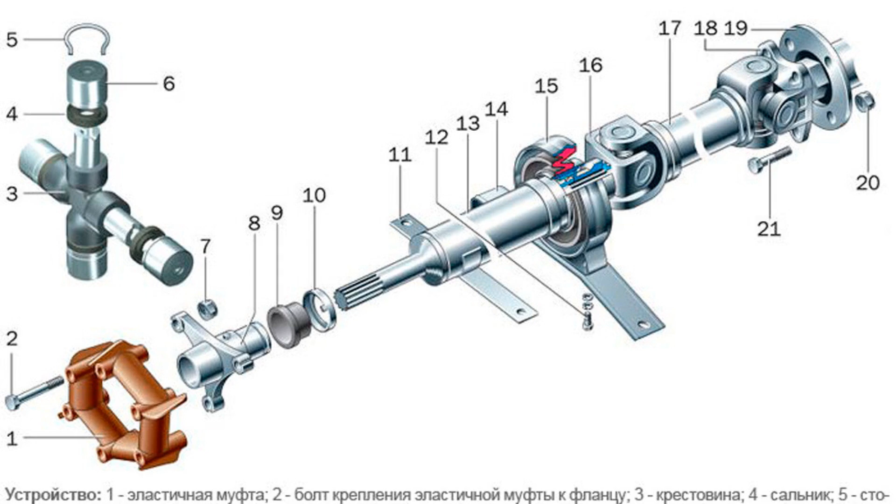This mechanism allows you to provide movement for the wheels and suspension independent from the body of the vehicle. Not everyone fully understands why a drive shaft is needed as part of the automobile design. Such a device becomes practically indispensable when the car drives on rough terrain. When the vehicle moves on uneven surfaces, there are quite strong vibrations on the driving axles, frame, and body. And when there are even minor displacements of axles relative to each other, it significantly increases the wear of elements. As a result, the smoothness of the car is disturbed, which directly affects comfort. All these phenomena can be prevented by the presence and operation of the cardan transmission.

Some vehicles are designed in such a way that the gearbox is located higher than the rear axle differential. Because of this, the torque has to be transmitted at a certain angle. It is possible to realize this transmission of rotation by using a cardan gear or cardan shaft in the design.

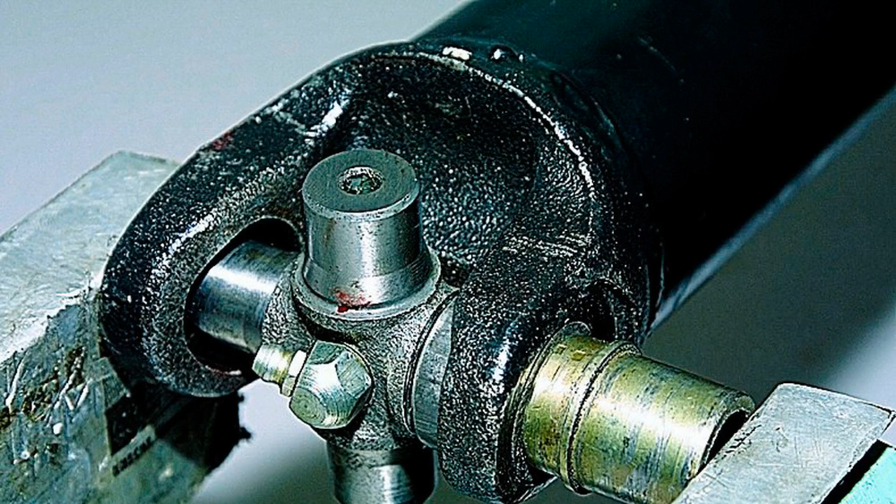Classification. There are several types of cardan gears. Several classification principles are used to determine the specific device. If we consider the types of cardan shafts according to their purpose, then the following are distinguished. Basic. They act as a support for the drive of the leading automobile wheels, meaning they are responsible directly for spinning the wheels in the car. Auxiliary. They are used as an element of the auxiliary mechanism.

They can be found paired with pumps and winches, for example. They can also act as an intermediate structure in various devices. It is also possible to divide the cardan gears into universal ones, which are characterized by the ability to compensate for quite impressive axial displacements. And simple ones, which are devoid of any tricks and features, but they clearly and qualitatively perform the duties assigned to them. But this is not all.

There is another variant of classification, which also divides gimbal gears into two types. Open: this is an independent and separate mechanism in the design of a motor vehicle. Closed: this type of drive shaft is either hidden from view or integrated into another vehicle component.

Based on the design features and purpose, driveshafts can be divided into single-section and multi-section driveshafts. Multi-sectional ones are mainly used in conventional passenger cars and trucks. In the case of single-section driveshafts, we are talking about situations where the need for fast rotation on the drive axle plays a major role. This applies to sports cars that are equipped with rear-wheel or all-wheel drive.

Features of the device. Leaving aside some of the CV components such as seals, mountings, and the elastic coupling, this unit contains several key components.

Although the same coupling plays an equally important role, as it is responsible for absorbing vibrations and sudden jerks.

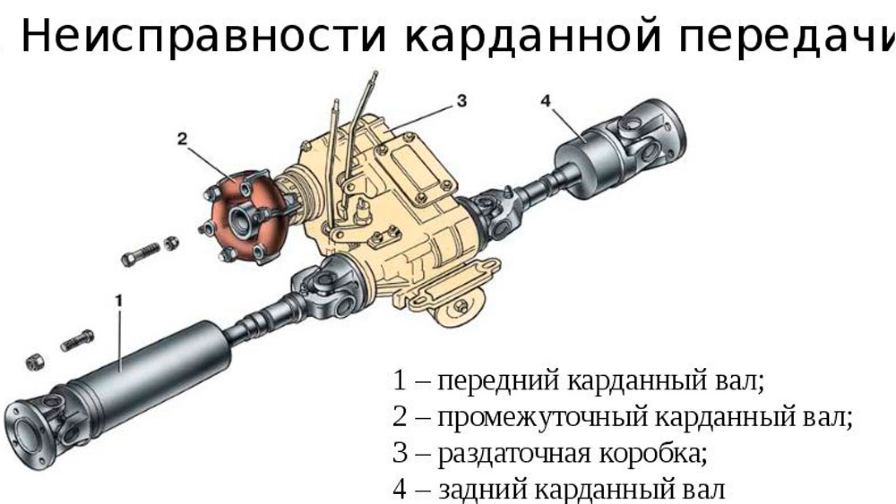As for the device of the cardan transmission, it is necessary to distinguish such components as the central shaft, made of high-strength steel, with the appearance of a hollow tube, and crosses that have swivel mechanisms. A pair of these cross members is used to ensure that all components of the transmission rotate at a certain specified angle.

This is largely responsible for the smooth transmission of torque: spline sliding joints. This element is necessary due to the fact that when driving over bumps or other obstacles, the distance between the axle gearbox itself and the gearbox increases. Therefore, it is necessary to extend the PTO shaft somewhat. This is where spline elements come to the rescue, sliding fork, with its help the ends of the center and intermediate shafts can be coupled or connected to each other.

Suspension bearing, necessary to support the structure, which allows the gimbal to rotate freely along its own axis. Depending on how many sections of the cardan are used in the design, a different number of suspension bearings are used. They are mounted directly on the body of the vehicle.

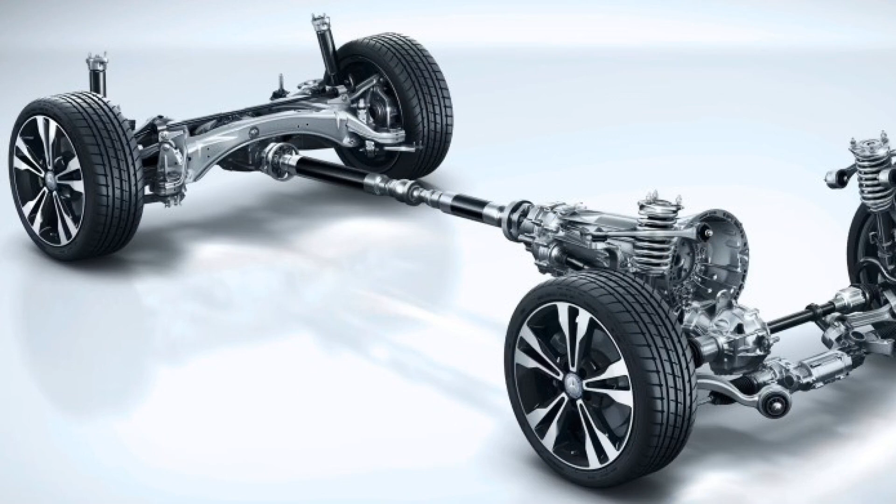But it is not enough just to know what the automobile cardan shaft consists of. It is also necessary to further disassemble the features of all working components. To understand how the cardan shaft works in the car, it is necessary to clarify some nuances about the components of the unit. This way you will better understand the basis of the PTO transmission used in the car.

These units are available as twin-shaft or single-shaft units. In the case of a twin-shaft unit, the mechanism additionally includes an intermediate cardan, to which a shank is welded in the rear section, complete with external splines, and a sliding bushing is mounted to the front section by means of a joint. If the system is single-shaft, then there is no intermediate section on it.

Then the CV outboard bearing is mounted, which with the help of a special bracket is installed and fixed on the body. This acts as an additional mount that prevents excessive shifting during travel. After that comes the fork, which is located between the front and rear of the CV. This is where the cross member with needle bearings is located. These forks and crosses in the design of the PTO shaft allow torque to be transmitted at various angles of possible bending of the PTO shaft.

The CV is fixed at the rear to the rear axle gearbox by means of a flange. At the same time, the shank, which has external splines, is fitted directly into the drive flange of the automotive main transmission. The operation of the PTO transmission is based on the fact that it can transmit torque when the position of the PTO shaft changes in space.

To realize this function, two components play a key role, namely a fork and a cross-type joint. The sliding fork allows for a slight increase in the length of the mechanism when the vehicle is traveling on an uneven stretch of road.

The long spline joint does not allow you to stop transmitting torque, even in situations where the suspension together with the rear automobile axle begins to shift up or down. The task of the joint in this case is to ensure the rotation of the wheels at changes in the angle of bending of the cardan shaft.

It is accepted that the mechanism works productively when the angle does not exceed 20 degrees. If this value is exceeded, the process of active wear of the element begins.

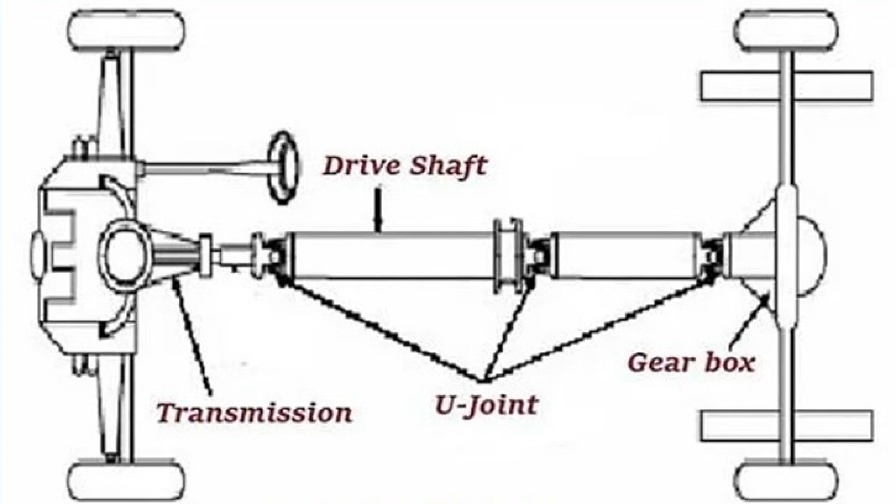Reliability and durability. To a large extent, these qualities are acquired due to the ability of the cardan to withstand serious loads. This advantage is especially relevant for heavy vehicles, as well as cars that often have to drive on uneven roads and rough terrain.

Maintainability. An important advantage of the CV is the fact that individual components can be changed during the repair process. There is no need to replace the entire assembly, which significantly reduces the cost of vehicle repair.

Better steering sensitivity. It is actively manifested on rear-wheel drive cars, where a cardan shaft is used. The drive practically does not depend on the cardan in any way, and therefore the front axle is focused on steering and the rear axle on pushing the car.

Good acceleration. The unit allows the rear wheels to be loaded, but at the same time unloads the front wheels. This helps reduce the likelihood of a phenomenon such as wheel spin on the car.

Rear axle skid control. If a rear axle skid occurs, it can be dealt with much more easily through the use of the PTO. Long service life: the element is really reliable, and its design ensures long service life.

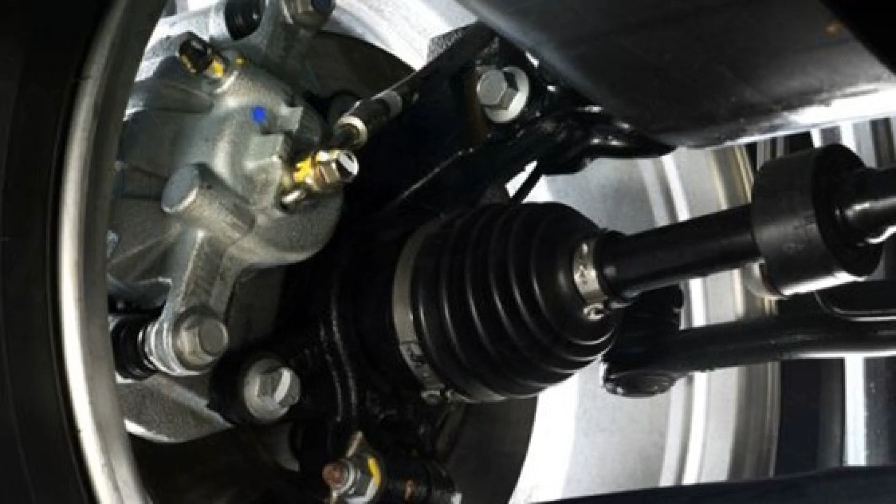Rebuildability. Even when the CV is badly worn or encounters serious breakdowns, it can be restored, although in certain cases this requires special equipment.

But the disadvantages in cardan shafts are also present, and they are sometimes worth paying attention to. If we talk about the weaknesses of the CV, then it is worth highlighting such moments. The main disadvantage is the fact that the shafts do not rotate synchronously when the angle between them increases. But in reality, this disadvantage is not particularly relevant for cars with rear and all-wheel drive. The disadvantage is manifested mainly in relation to front-wheel drive vehicles.

In this regard, the cardan is usually replaced by a more complex device with a similar purpose. This is a design called a ball joint or equal angular velocity joint. Another disadvantage is considered an impressive weight of the structure. Large weight negatively affects the dynamics of the vehicle and contributes to increased fuel consumption.

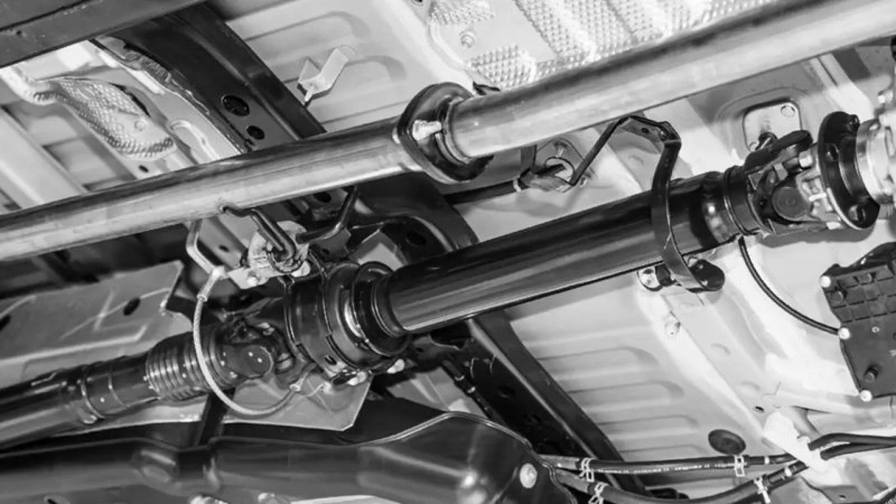In order to install a drive shaft in the car, a special tunnel must be provided. This has a negative effect on the comfort of the vehicle interior, as the middle of the car is sometimes quite a large bump. Cardan shafts can create additional noise and vibration.

Despite the existing disadvantages, some of them are quite conditional and cannot be considered a full-fledged disadvantage of the cardan shaft. Plus, manufacturers are actively working on improving the design, which makes it possible to get rid of some shortcomings as well as to correct the errors of previous versions of cardan gears.

Characteristic faults. The most susceptible to breakdowns in the design of the cardan shaft are such elements as crosses, joints, and bearings. During operation, they are subjected to heavy loads, and the components gradually wear out. Depending on what type of drive is used and what design a particular car has, the service life of these elements usually does not exceed 70,000 kilometers. The speed and intensity of wear are directly affected by operating conditions, driving style, and a number of other provoking factors. Signs of wear are characteristic clicks and knocks that occur when starting the vehicle or shifting gears.

If the front shaft crossmember breaks, there is a scraping and clattering of metal in the area of the front passenger's feet, plus the corresponding lights on the dashboard are turned on, signaling malfunction. Not solving the problem in a timely manner can provoke the breakdown of the front gearbox and automatic transmission, which will cost a very large amount of money. It is important to realize that it is impossible to prevent wear and failure of crosses or joints. It requires timely diagnosis and replacement of these elements in case of signs of malfunction.

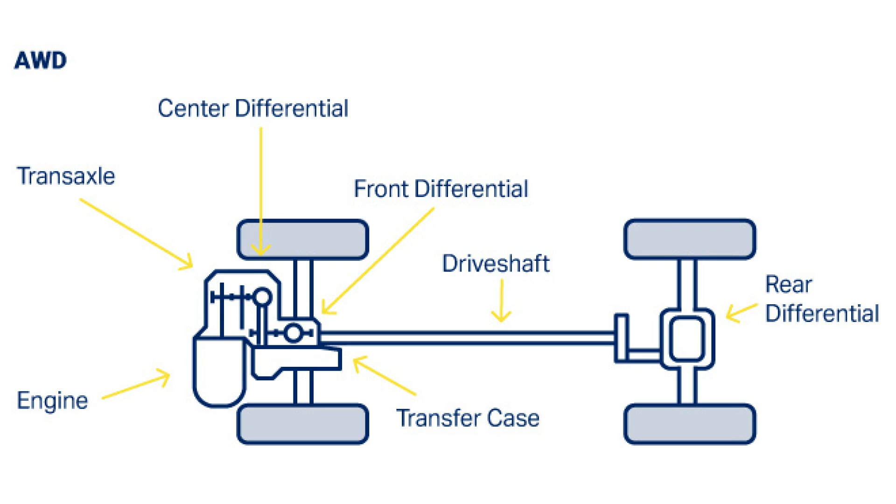In the design, the cardan shaft acts as the strongest element of the entire unit. For its production, high-strength steel is used, which can withstand about 500,000 kilometers of operation. Damage occurs mainly with careless driving, when the car hits obstacles. Breakage may also occur due to the breakage of cardan joints.

Symptoms of shaft malfunctions are vibrations from the underbody while driving. It is most likely that the cardan shaft has been bent. It is better to have it replaced in a workshop. If you try to align the shaft and do it incorrectly, you will provoke the destruction of the cross members and other components of the transmission of the car. Therefore, it is better not to take risks and immediately replace the element.

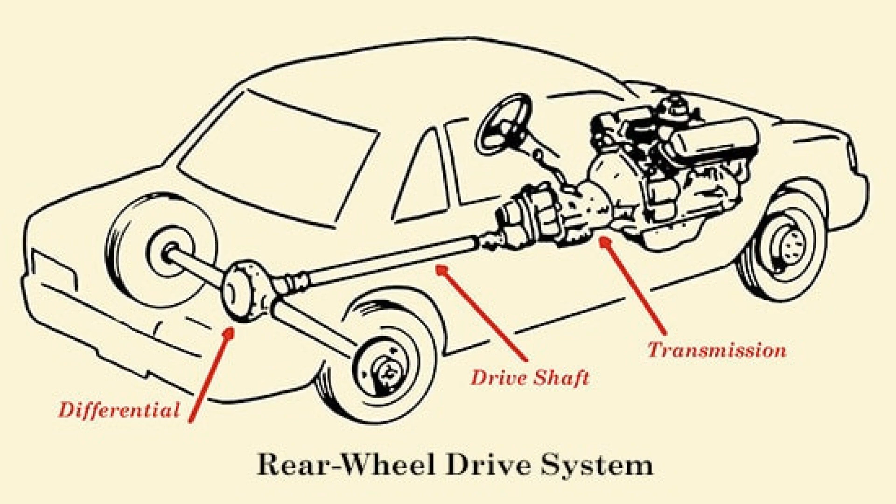Oil leakage. Such a problem is mainly found on cars that use a spline connection installed in the transfer case or gearbox. Leakage can be caused by roughness and burrs on the spline joint. To solve the problem temporarily, you can sand the surface with zero-grit sandpaper. But this will correct the situation only for a while. Therefore, the best solution is replacement.

Leakage occurs when the oil seal is damaged. In this case, the O-ring loses its elasticity, resulting in a gap between the movable PTO shaft and the gearbox packing. To eliminate the problem, it is recommended to change the oil seal.

Knocks when engaging the gearbox and vibration on acceleration. The knocks that occur when the shaft is loaded are formed due to gaps between the components of the assembly. This is what is considered the main factor. Extraneous sounds are formed due to the occurrence of backlash in the cross, which is caused by its destruction. Cross members should be replaced.

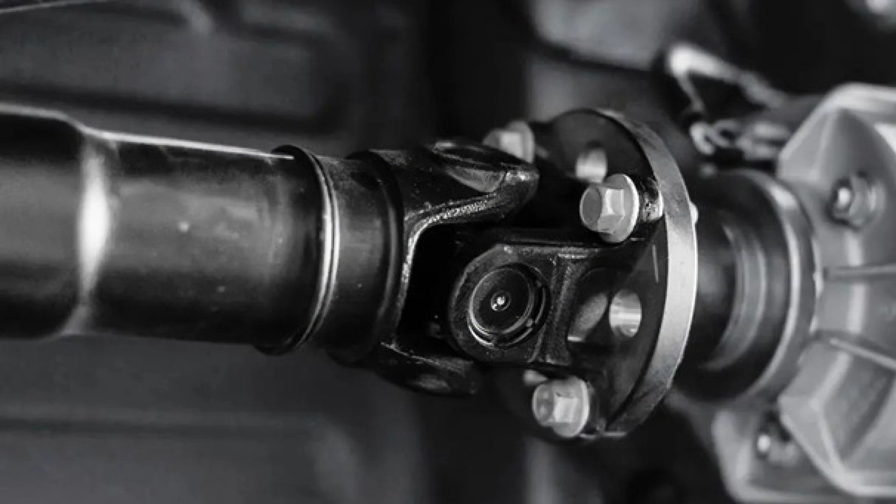Knocks also appear due to the fact that the tightening of the bolts has loosened. To rule out this cause, check all joints and tighten bolts if necessary. Extraneous noises are sometimes caused by a high degree of wear on the sliding spline joint. Only replacement will help in solving the problem.

Squeaking under acceleration, pressing the gas pedal. Uncharacteristic extraneous sounds in the form of squeaks may occur. If the squeak occurs periodically or constantly when pressing on the pedal, as well as when driving the so-called rolling, then the cause should be sought in defects in the joints of the cross, or the problem is related to the ball joints.

When the cross member jams, and in parallel there are rusty drips on the surface, the cup bearing has clearly been deformed. It is recommended to replace the element as soon as possible, because ignoring the problem will lead to even more serious and expensive consequences. If the matter is in the jamming of the ball joint, then it is recommended to disassemble the unit and lubricate its elements as necessary. When such a measure does not help, it remains only to replace the part.

Vibrations. Motorists sometimes encounter such a phenomenon as the occurrence of vibrations in the CV. Often the reason lies in the imbalance of the wheels. When the vibration is observed only at speeds ranging from 60 to 80 and from 90 to 120 km per hour, to solve the problem it is usually quite enough to carry out balancing of the cardan. Such a procedure is often mandatory when part of the element is replaced or assembled without reference to the factory markings.

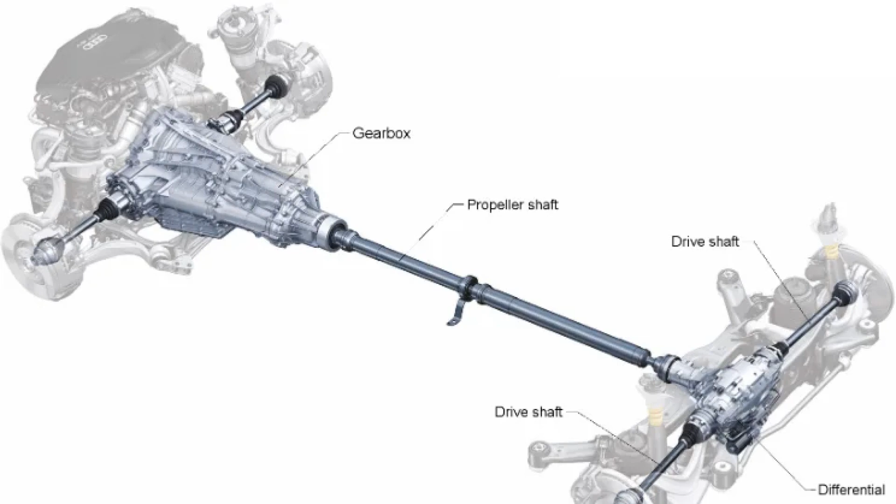If no repair work was carried out, i.e., errors during reassembly are excluded, and the vibrations themselves appeared suddenly and appear at certain speeds, increasing as the speed increases, it is necessary to perform several diagnostic measures. Namely, check for clearances in the cross joints, which usually cause the vehicle to not run smoothly. If the culprit is found, the already worn joints will need to be replaced. During the installation of the intermediate shaft, foreign particles, debris and contaminants may have penetrated there. It is recommended to clean the PTO flange and the receiving flanges. Also check for corrosion and possible tears in the balancing plates. If necessary, a proper balancing should be carried out.

The center shaft may have been bent and deformed as a result of a severe mechanical impact. If the deformation exceeds 1.5 millimeters, it is recommended only to replace the element. When the damage is smaller, the pipe can in theory be aligned using a hydraulic press. Here there can be several options. It is better to start with the smallest and easiest in terms of elimination. If you can't deal with the problem yourself and you can't find the cause of the problem, it's better to get help from a specialist.

Suspension bearing problems. Such a problem can be diagnosed by a characteristic sound. The failure is manifested as a rustling sound. If you hear a rustling sound, there is a high probability that the outboard bearing is broken. In its normal state, this element rotates easily. Its movements are smooth and almost silent. No jamming is observed. If there is a sound, then the bearing will need to be replaced. It makes no sense to try to repair it.

Useful recommendations. Remember that it is in no way possible to ignore any signs of malfunctions of the cardan. If you do not heed this advice, you may face the following consequences. If the cardan breaks, the body of the vehicle itself is damaged. Additionally, the cardan can damage the piping that runs along the bottom of the car. If there are constant vibrations, it will negatively affect the rigidity of the suspension and body mountings. Also, all threaded connections and fasteners of interior panels will begin to weaken. The car will literally begin to fall apart on the move.

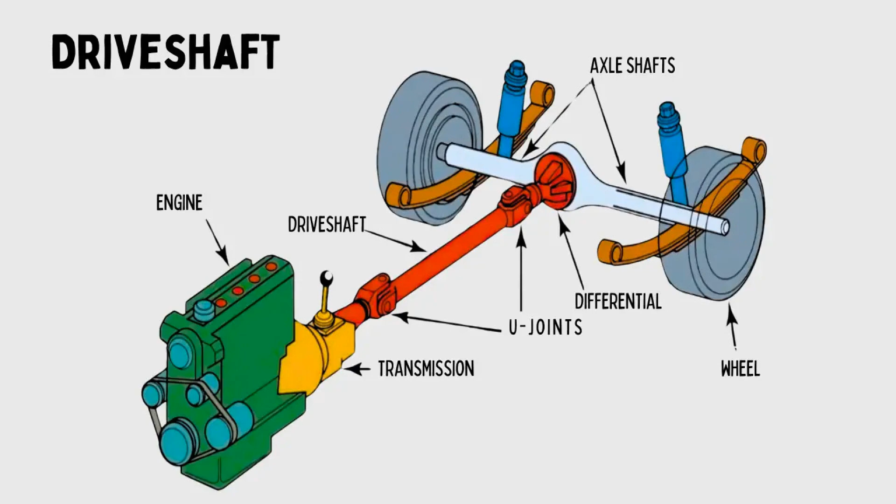All parts directly connected with the cardan shaft will wear faster and more intensively. This will significantly reduce their operational life, require early replacement, and expensive repairs. It is unlikely that any car owner will consciously want to face such troubles, but in many ways they can be avoided by following a few simple rules. All these recommendations are aimed at increasing the service life of the drive shaft. If you are interested in preserving the resource of the CV, then it is necessary to try to minimize the operation of the car in rough terrain.

Do not accelerate sharply, move off smoothly. Do not idle the car for long periods of time. Do not save on quality spare parts. Carry out diagnostic measures. In case of complex malfunctions, contact qualified specialists. The cardan shaft is in many ways an important element of the vehicle, which, although it is considered an intermediate link, performs a key role in the operation of rear-wheel drive and all-wheel drive cars. The node does not have an extremely complex device, and its principle of operation is clear to many. This allows you to independently solve arising problems, timely detect malfunctions, and maintain the CV in working condition for a long period of time, just by following a few simple rules.

In conclusion, the drive shaft plays a crucial role in the operation of a vehicle, serving as the vital link between the engine and the wheels. By transmitting power from the transmission to the differential, it enables smooth acceleration and efficient power delivery. Additionally, the drive shaft accommodates the movement of the suspension, ensuring that the vehicle maintains stability and performance on various terrains. Understanding the importance of this component not only enhances our appreciation for automotive engineering, but also highlights the intricate systems that work together to keep us safe on the road.